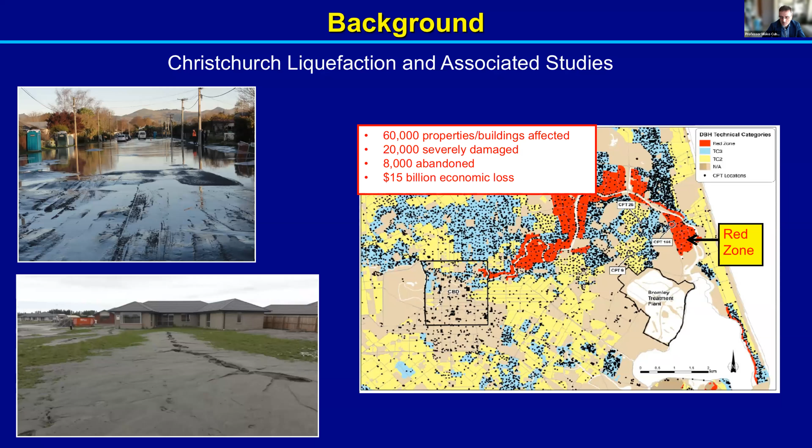There are numerous images such as those shown to the left, illustrating the extreme severity of Christchurch liquefaction. In one of our studies, we investigated in great detail 55 well-documented case history sites. As you can see, the sites are distributed throughout the city, and the red symbols here indicate sites that manifested liquefaction in multiple events. In most of the cases, it was severe or extreme manifestation of liquefaction.

Green symbols indicate sites that did not manifest liquefaction in any event, whereas black symbols indicate sites that didn't manifest liquefaction in the first major event in September 2010, but they did manifest liquefaction in the subsequent February 2011 event, which imposed the most severe shaking intensity throughout the city.

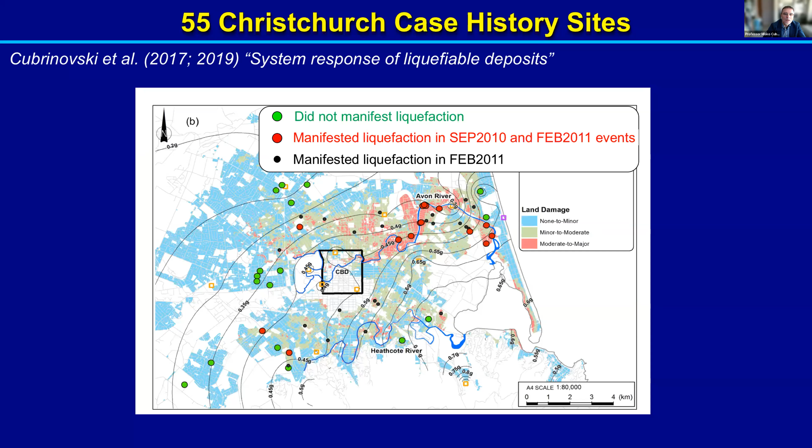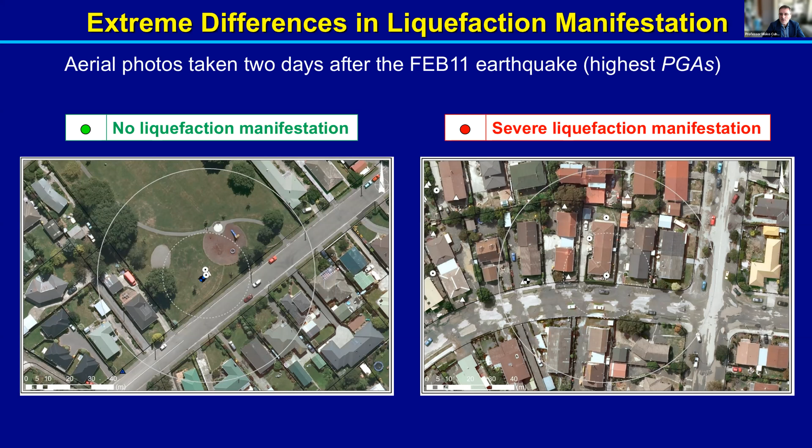There were contrasting differences in the performances of these sites, as evidenced here. On the left-hand side, you have an aerial view of a site that didn't experience any evidence of liquefaction, and you can't really see any ground distress due to liquefaction. Whereas on the right-hand side, you can see the image of a site that manifested severe liquefaction with large areas covered on the ground surface with ejected soils due to liquefaction. So with these studies, we tried to understand what are the key factors that were creating these kinds of differences in the performances.

And it was interesting that we found some important similarities, but also important differences between the two sites that manifested very differently during the earthquakes. On the similarity side, all sites had very shallow water table, and they had also very weak layer close to the surface of low liquefaction resistance, which would be considered a critical layer from manifestation viewpoint.

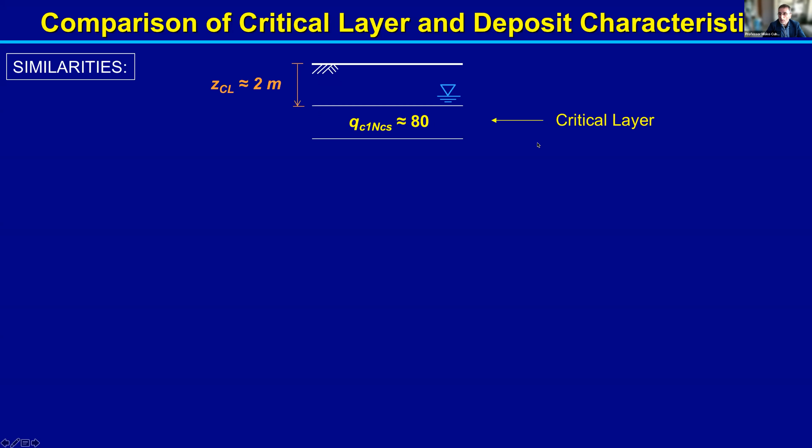As you can see, that layer is just 2 meters below the ground surface and has low QC1NCS value of about 80. And this was one of the reasons why the simplified method could not discriminate well between different performances, because in both cases, for sites that didn't manifest and for sites that did manifest liquefaction, the simplified method would predict severe consequences because of this very low resistance layer at shallow depth.

We found some important differences in the deposit characteristics between these sites. So sites that manifested severe liquefaction typically were composed of vertically continuous liquefiable soils, meaning all top 10 meters of the deposit were liquefiable soils, as shown by the CPT profile and schematic simplified profile next to it on the left-hand side. On the right-hand side are typical deposit characteristics for the sites that didn't manifest liquefaction, and they are characterized by interbedded deposits composed of non-liquefiable and liquefiable layers.

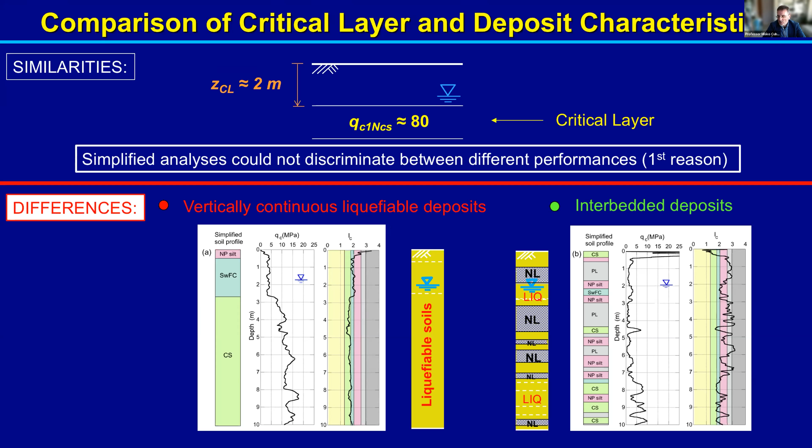So in our study, we were trying to understand how these differences in deposit characteristics are going to produce different responses of liquefaction when subjected to earthquake shaking. And for that reason, we used the seismic effective stress analysis to investigate those details. I will summarize now briefly some of our key findings from that work.

This slide is summarizing the key interpretation for vertically continuous deposits, or how liquefaction evolves throughout the depth and time in these deposits. Starting from left, in these deposits, typically triggering first occurs in the critical shallow layer. And this occurs early during the shaking, so the additional shaking is going to cause significant shear strains developing in that layer. Then the underlying soils are developing higher excess pore water pressures and triggering upward flow of water towards the critical layer, which further weakens and fluidizes the critical layer.

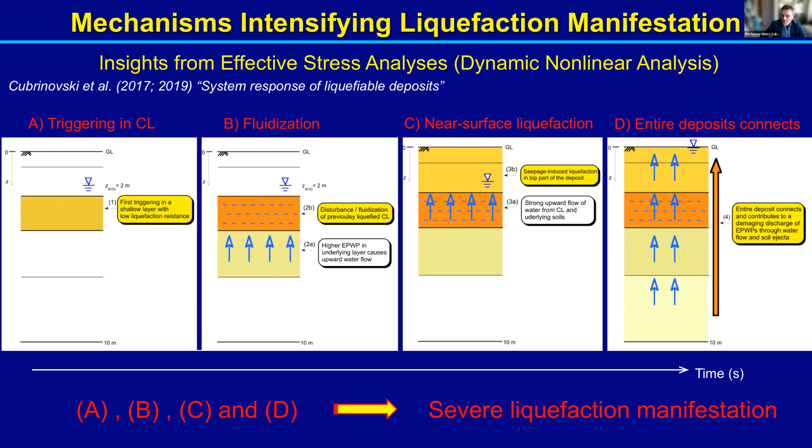This also enlarges the zone of liquefaction. So now this thicker zone of liquefied soil is producing strong upward water flow towards the ground surface and inducing liquefaction. Seepage-induced liquefaction occurs in the surface soils. And these three mechanisms then connect to create a mechanism throughout the whole deposit in which the soils from the entire deposit contribute to a very damaging discharge of excess pore water pressures through water flow and soil ejecta. These are all mechanisms that intensify liquefaction manifestation, and this can explain the large severity and extreme manifestation effects of liquefaction that we were seeing in those deposits.

From the effective stress analysis, we found that the mechanisms at work for the interbedded deposits are quite different. Typically, this deposit would have loose liquefiable soils at shallow depth, but also in the deeper part of the deposit. So the typical scenario for this deposit was that liquefaction actually first developed at depth, and the softening of the layer at depth was reducing the seismic demand for the deposit and reducing the shear stresses acting on the shallow critical layer. This in turn reduced the potential for liquefaction developing in the critical shallow layer.

In addition to that, because of the interbedded nature of these deposits, including some plastic soils, the near surface soils were partially saturated. And this further reduced the potential for development of liquefaction in the critical layer. Finally, as shown here, the grid of non-liquefiable layers is preventing any vertical continuity and communication of water through water flow of the liquefied soils. So these three mechanisms eventually resulted in relatively thick crust at the ground surface, and this crust prevented manifestation at the ground surface of liquefaction, even if liquefaction had developed at some depth within the deposit. So these are typical mechanisms that mitigate liquefaction manifestation.

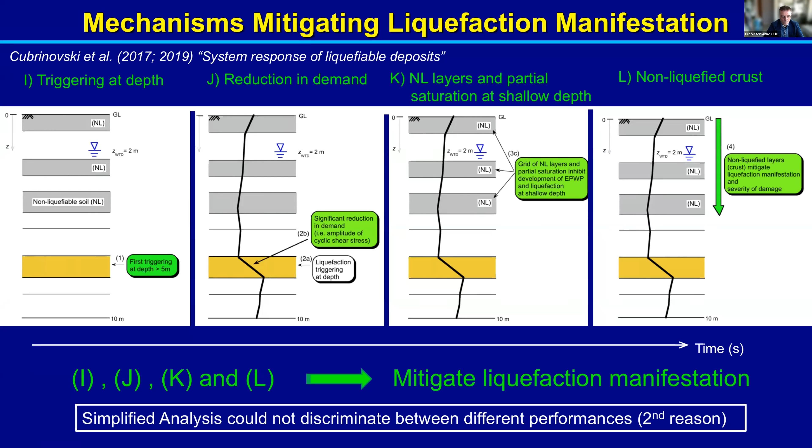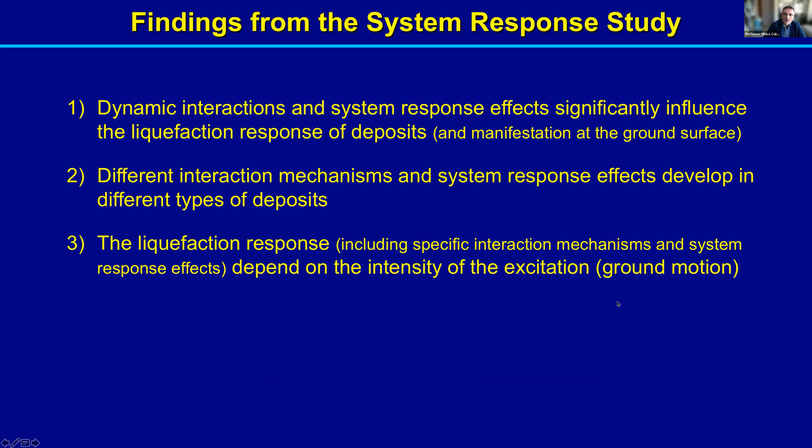So here is a brief summary of some of our key findings. First is that dynamic interactions and system response effects significantly influence the liquefaction response of deposits and manifestation at the ground surface. Different interaction mechanisms and system response effects develop in different types of deposits. And finally, the level of the liquefaction response that will develop and the type of mechanisms that will be triggered throughout the deposit really depend on the intensity of the ground motion or excitation.

Which brings us to the need to perform holistic evaluation of liquefaction response, which means we are trying to understand how the liquefaction response is going to evolve in the deposit as we are increasing the intensity of shaking. So that is the idea behind this holistic evaluation.

So after this brief background, I'm going to provide a summary of the concepts behind the holistic evaluation of liquefaction response. And we'll then move on sharing the results from effective stress analysis of 13 of the 55 sites where we have performed additional analysis within this framework. And then we'll show the result from simplified analysis of the same deposits so that we see what are the key differences and similarities between these two types of analysis.

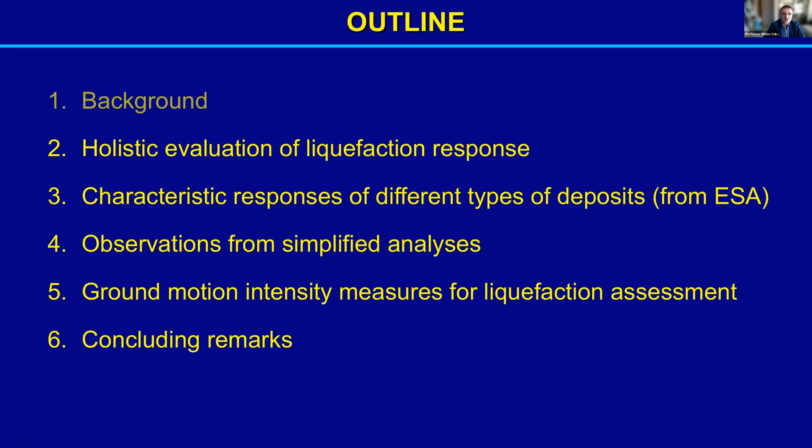Finally, I'm going to make a very brief comment on the ground motion intensity measures for liquefaction assessment, and will summarize with concluding remarks. So the framework of holistic evaluation of liquefaction problems is applicable to all types of problems, including soil structure interaction, but here we're going to focus on free-field level ground deposits.

So when evaluating the liquefaction response of deposits, I would argue that we have to address concurrently three factors in the assessment. The first is the soil response at any given depth, throughout the depth of the deposit. And this is equivalent to what we do in the laboratory when we collect high-quality samples. We test them in the laboratory to identify material characteristics and stress strain characteristics, including liquefaction resistance, and understand how that soil element is going to respond under earthquake loading when considered in isolation. So that is why I refer to this as element response.

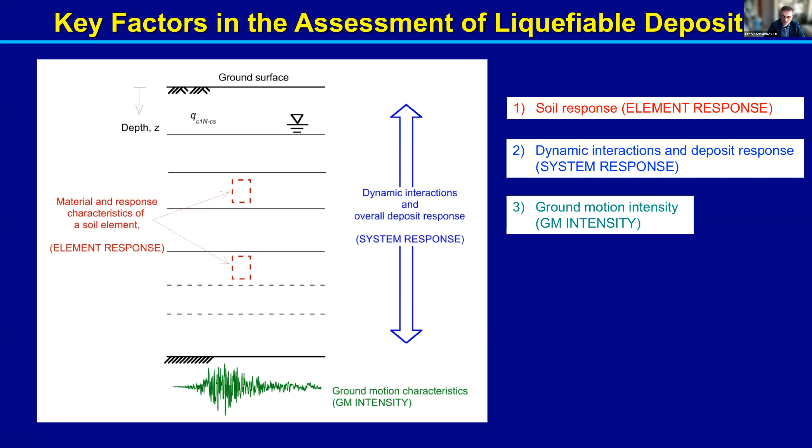From the previous discussion and the clear effects of dynamic interactions throughout the deposit, we need to also account for the second factor, which is cross interactions between soils and layers in the deposit and overall deposit response. And finally, the response at any given soil element, as well as the overall response of the deposit, clearly is going to depend on the intensity of the ground shaking. So we have to bring the intensity of the ground motion into the picture and concurrently consider these three factors in the evaluation.

On the horizontal axis, again, we can use different intensity measures. PGA 7.5 will be heavily used. I will explain the reasons why later on. It is not the best intensity measure, and at the end I will address some more appropriate intensity measures for nonlinear dynamic analysis, such as acceleration spectrum intensity and velocity spectrum intensity, and these are measures relevant for assessment of liquefaction response.

The idea is that we develop understanding of how a certain response feature is going to evolve as we increase the intensity of shaking. And this may allow us to identify important differences between deposits in their response characteristics, including differences in the mechanisms that lead to those responses.

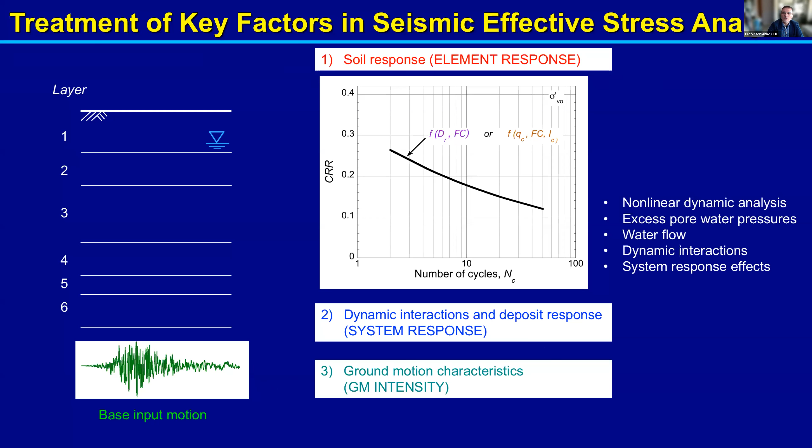And finally, the input motion is applied at the base of the deposit as a time history. We can adopt different ground motions, and with that we can examine how the response is going to change when we change the intensity of the ground motion or we change the characteristics of the ground motion. So we have rigorous treatment of all three factors.

In the simplified method, liquefaction resistance is typically derived from empirical triggering charts, and I would argue that this is good enough and rigorous enough evaluation of the liquefaction resistance for many of the deposits. We still have some problems there, but generally we're doing a reasonable job there.

The second factor is actually not considered. There are no dynamic interactions in this procedure. In essence, for any given layer, we calculate the factor of safety in isolation for that layer without any consideration of what is the response in the surrounding layers or the deposit as a whole.

And finally, the ground motion, or the input earthquake load, is severely simplified. We are using a couple of parameters, typically peak ground acceleration and earthquake magnitude. The first one is a proxy for the amplitude of shaking, and the second is the proxy for duration or significant number of cycles. And as a combination, they define the intensity of the input load, albeit in a simplified manner. One very important feature is that the load is defined at the ground surface.

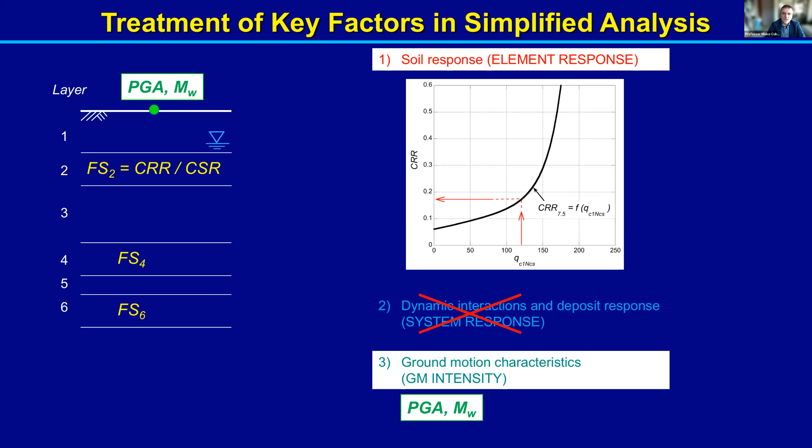Because of the way the load is defined in the simplified method, and as it differs quite severely from what we do in the advanced analysis, it is impossible to identify identical intensity measures for these two approaches in definition of the ground motion. And I will address that issue later on.

So the approach of this study was to select 13 sites from the 55 case history sites from Christchurch and perform seismic effective stress analysis for those sites. We derived numerical models using the CPT data, and for the layers defined in terms of qc1Ncs, we derived liquefaction resistance curves based on the Boulanger and Idriss triggering relationships, and then applied analysis using two ground motions as base excitations. And we increased the intensity of the applied load from very low to very high intensities to understand how the liquefaction response evolved in any of these 13 deposits. And we used this analysis to gain some further insights into the liquefaction response of different types of deposits.

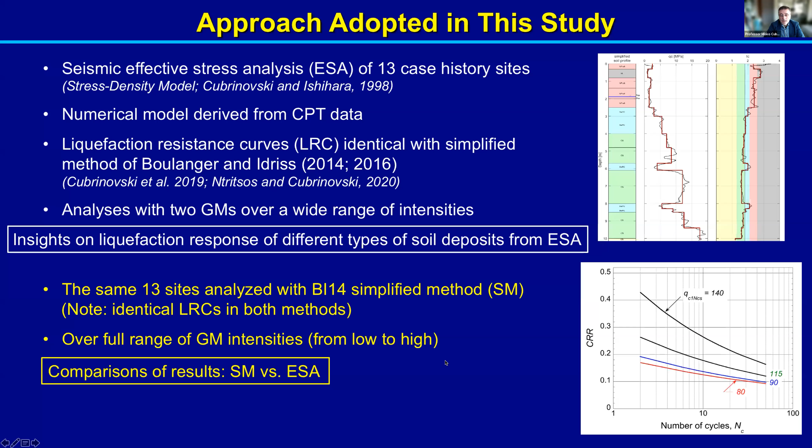The same 13 sites were then analyzed with the simplified method using the Boulanger and Idriss procedure. Notice that in both these methods, the definition of the liquefaction resistance is identical or equivalent, because in the effective stress analysis, we were using the triggering relationships from the simplified method to define the liquefaction resistance. So for the simplified analysis, a wide range of ground motion intensity measures were also covered. And then eventually we compared the results from the effective stress analysis and simplified analysis to identify key points of similarity and difference.

Just a brief reference to how we selected the 13 sites for analysis. Out of the 55 sites, there are 11 sites that we refer to as vertically continuous deposits, and you can see typical simplified profiles for these sites. They're mostly composed of sandy soil. Ic is 1.5 to 1.7 in these green layers, which are sands. qc1Ncs is mostly 120 to 125, though there are parts of the deposit that are denser, so 150, 160, 170 values for qc1Ncs are also encountered. In the top part, some of those deposits contain sandy silt and silty sand soils up to 2-3 meters depth or 4 to 6 meters depth, as shown with these profiles. So we selected 5 sites which are representing this type of deposits.

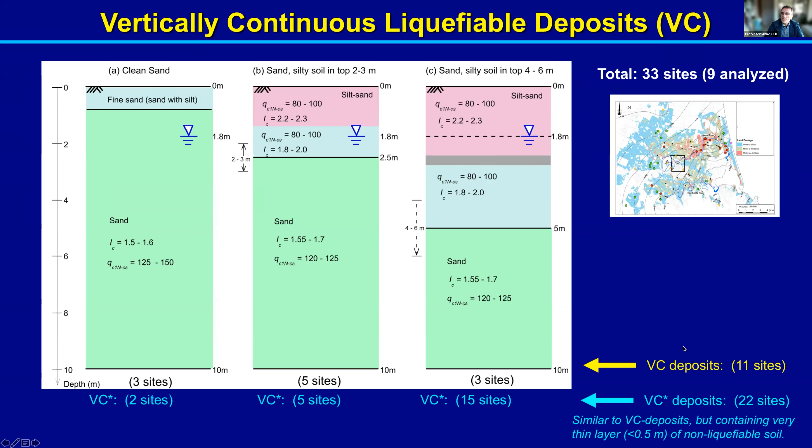In addition to that, there are 22 additional sites that have very similar characteristics to what we are seeing here, but they do contain a very thin layer of non-liquefiable soil, which is 30, 40, 50 centimeters thick, as indicated here by this thin gray shaded area. Essentially, these are vertically continuous sites, so we treat them as such, but we added 4 from these 22 sites for our in-depth analysis. And finally, we considered the interbedded deposits.

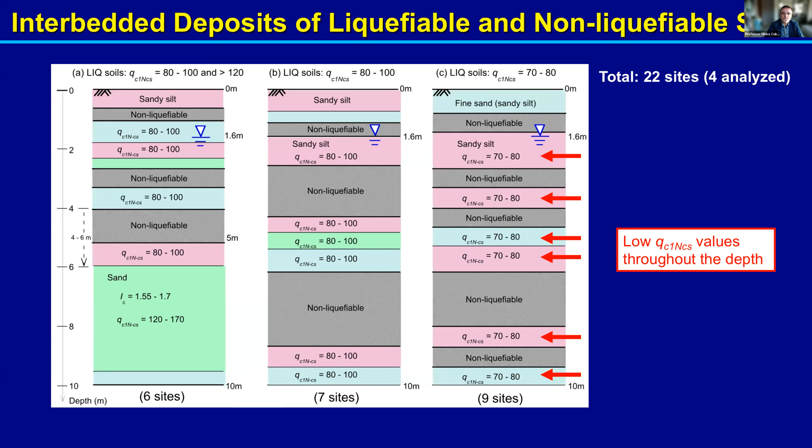In this type of deposit, for 9 sites, throughout the depth of the deposit, there is a low resistance layer with qc1Ncs of 70 to 80. All of these layers are sandwiched between non-liquefiable layers. These are similar types of deposits, except that qc1Ncs here is 80 to 100, still quite low. So one key feature of the interbedded deposits is that they have soils of low liquefaction resistance throughout the deposit, including at large depth.

So we selected 4 of those interbedded deposits for analysis. So in total, that made it 13. And then we subjected each of these to different levels of intensity of earthquake loading. And we examined the case history database from Boulanger and Idriss.

This is a CPT database in which there are 253 liquefaction case histories from 19 earthquakes, to identify what is the typical range of peak ground accelerations for the case histories. So this is the summary for all 19 earthquakes. For example, this black line here indicates the range of PGAs for the Christchurch earthquake.

So on the vertical axis, we have the recorded PGAs. So the PGA at Christchurch for the case histories was roughly from 0.18 G to 0.45 G. And on the horizontal axis, we can easily identify the respective PGA 7.5 values. Those are peak ground accelerations for equivalent magnitude 7.5. You can see the distribution of PGA 7.5 values for all case histories.

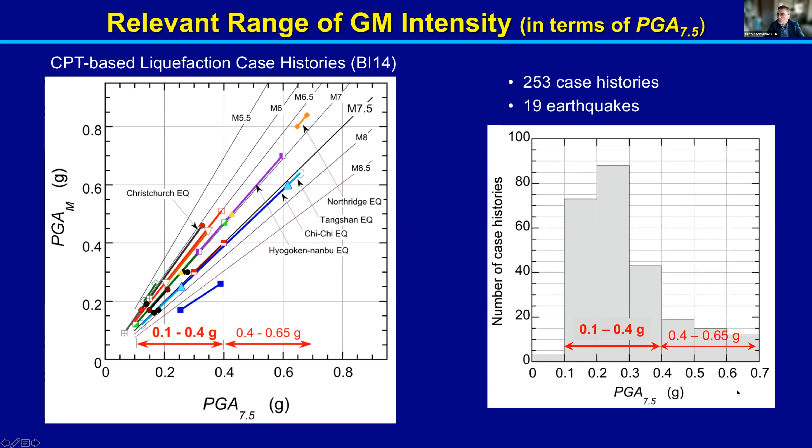So predominantly, PGA 7.5 was in the range from 0.1 to 0.4 G. And there is a smaller number of case histories that experienced a higher intensity of shaking, from 0.4 to 0.65 G. Obviously, these are sites closer to the source. So the conclusion from this was that in the holistic assessment, we have to cover intensities at least up to 0.7 G in terms of PGA 7.5.

Which brings us now to the results from the effective stress analysis for 13 case history sites based on using 2 input motions at the base. I will first show a typical and illustrative example of how the liquefaction response evolves throughout the deposit. So this is one of the vertically continuous sites.

We performed incremental dynamic analysis. So one analysis, say at 0.05 G, then another at 0.08 G, then 0.1 G, and so on, up to maybe 0.9 G. So I'm going to present some of those analyses to share the insights for how the liquefaction response evolves throughout the deposit.

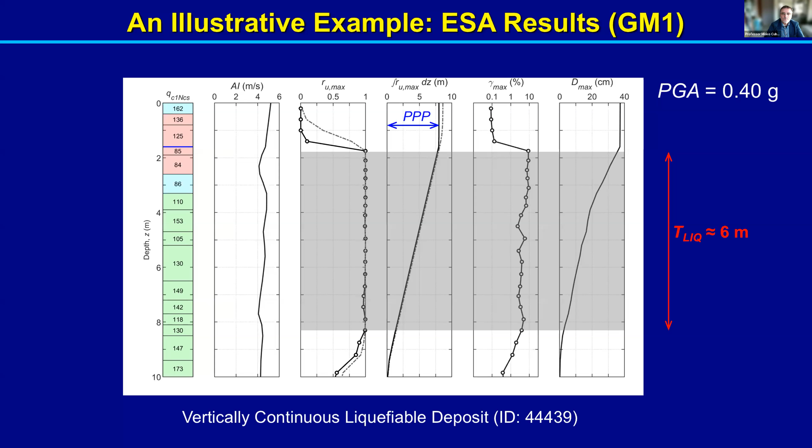As you can see, the soil from 2 to 8 meters depth liquefied, and then significant excess pore pressures are also generated below and above that liquefied zone. If we integrate RU in the top 10 meters, we are getting that the total excess pore pressure developed is equivalent to 8 meters out of the 10 liquefying. So clearly, we are getting very significant effects of liquefaction. Importantly, as you can see in these vertically continuous deposits, we are getting a very thick zone of liquefied soil.

So now we can summarize this type of results by plotting the results in this format. On the vertical axis, we now have the thickness of the liquefied soil. On the horizontal axis is PGA 7.5, or the intensity of the applied load. This is the thickness of liquefied soils that develop pore pressure ratio greater than 0.98 and also developed shear strain greater than 3%, meaning this is the thickness of soil liquefied due to shearing.

This is shear-induced liquefaction. So liquefaction triggering occurs at about 0.15 G, and the thickness of the liquefied soil increases. At 0.4 G, we can see 4 meters of the deposit liquefied, and then there is a further increase, and we reach the maximum at around 0.7 G, where 7 meters of this deposit liquefied.

Importantly, in this case, as we saw previously, all liquefied layers are practically connected, and they create this intensification mechanism, because collectively they increase the intensity of liquefaction because of the connection of pore pressures and water flow through those layers.

The same result here is now plotted with the dashed line, but in addition to the thickness of the liquefied layers, the blue zone now indicates the thickness of surrounding soils that have developed excess pore water pressures higher than the excess pore water pressure at the top of the critical layer. So, for example, at 0.4 G, this implies that there are 7 meters of soils in the deposit that contribute to water flow towards the top of the critical layer.

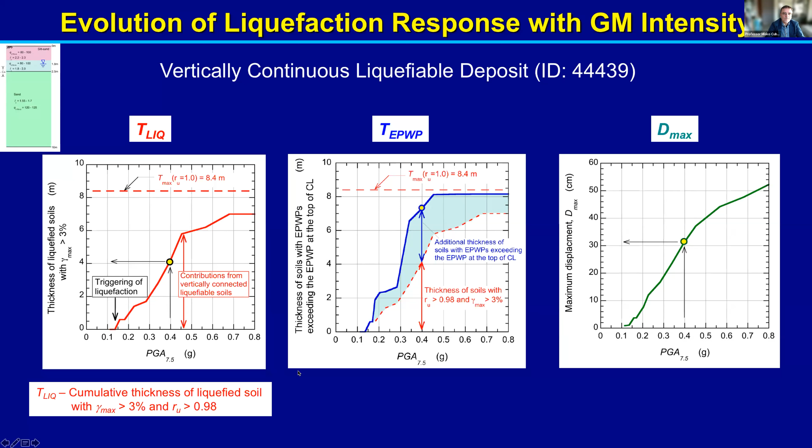So this is giving some insights about the significance of the seepage-induced effect, or water flow effects, throughout the deposit, and especially on the critical layer, which is close to the surface. Obviously, using this framework, we can display different types of results. Here to the right, for example, is how the horizontal displacement at the ground surface is increasing with increasing intensity of the ground motion.

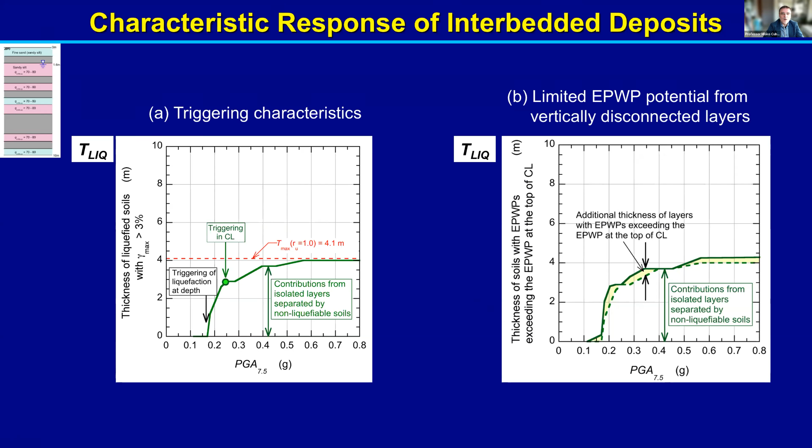In addition to that, we are seeing practically no additional contribution from excess pore water pressures from surrounding soils, which is simply reflecting the fact that the surrounding soils are mostly non-liquefiable.

Here I will now, just give me a second to, okay, thank you.

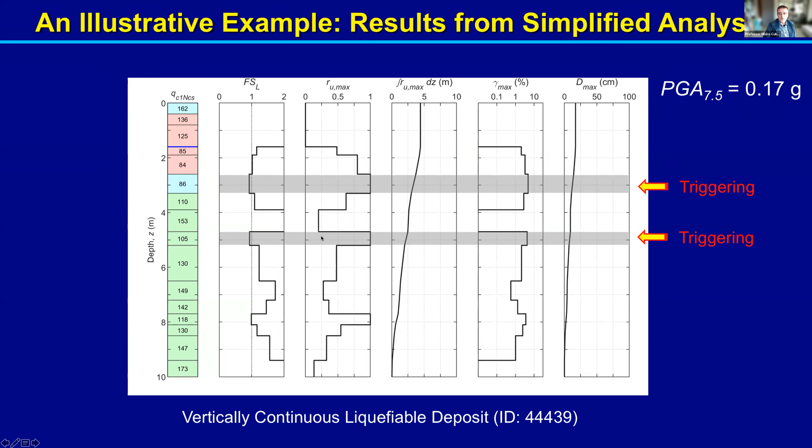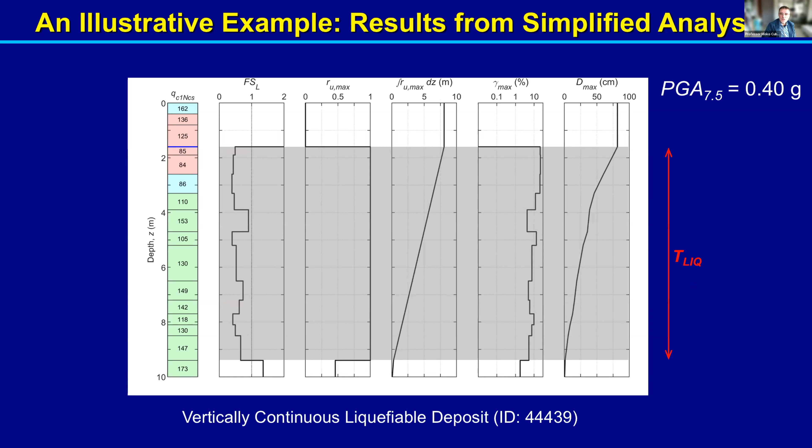So let's now compare these results with what we observed from simplified analysis. I will do the same animation as before for the same profile to illustrate how liquefaction response evolves in the simplified analysis. So this is now analysis for PGA 7.5 of 0.17 g. Triggering occurs pretty much in the same layer at similar intensity level. There is also triggering at a larger depth at 5 meters, which is reasonable because we have another weaker layer with qc1Ncs of 105 there. If we increase the intensity to 0.3 g, we are getting larger thickness of liquefied soils. And if we further increase the intensity to 0.4 g, most of the deposit liquefies. So generally, we are seeing a very similar thing.

But if we want to compare results from effective stress analysis and results from simplified analysis, we really need to compare them for identical intensity of the earthquake load applied in both analyses. Unfortunately, because of the way the earthquake loading is specified in the simplified method, it is impossible to identify identical intensity for these two analyses. At best, we can get close to similar intensities. And a parameter that is providing that is PGA 7.5, and that is why we have used it so far in all these plots. PGA 7.5 is peak ground acceleration for equivalent magnitude 7.5, and we estimated it for each of these analyses by converting the irregular time history that we applied at the base of the input motion to uniform amplitude series. And in that process, we adopted 15 cycles for the magnitude 7.5 earthquake, and the exponent in the magnitude scaling relationship was 0.34.

Obviously, PGA 7.5 in the simplified analysis can be easily calculated by using the PGA value, the earthquake magnitude, and the magnitude scaling relationship. Even though they're both called PGA 7.5, the way we calculate and define them is obviously very different. So we're kind of comparing apples and oranges to some level. Fortunately enough, what we found was that the PGA 7.5 that caused triggering in the simplified analysis was very similar to the PGA 7.5 that caused triggering in the effective stress analysis. As you can see, for 11 of the 13 sites, the triggering values in simplified and effective stress analysis are within 15% difference. There are two sites that differ more. One is a denser deposit, and the other is a very soft, non-liquefiable layer in one of the interbedded deposits that heavily affects the response in the effective stress analysis, and this effect is not accounted for in the simplified analysis. But generally, the triggering is at the same level, which really facilitates the comparisons that I am going to show next.

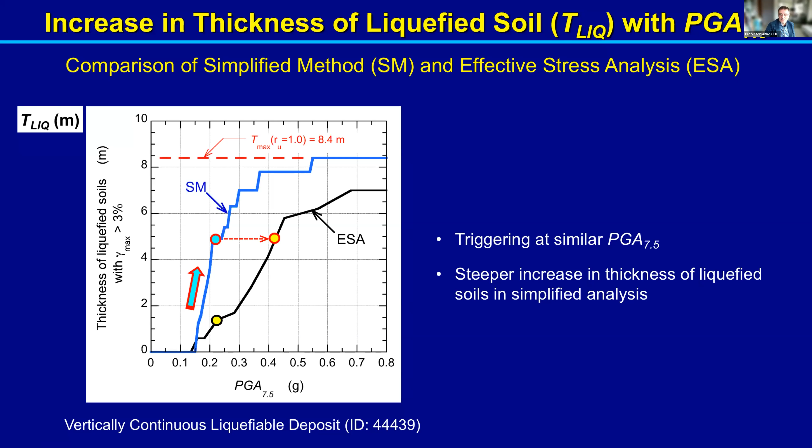So this is now comparison of the observed responses in terms of thickness of liquefied soils in relation to the intensity of the applied load. The black line is showing the response of the effective stress analysis, and the blue line is showing the response from the simplified analysis. We can see much steeper rise of the thickness of the liquefied soil in the simplified method as compared to the effective stress analysis. For example, at 0.22 g, 5 meters of soil are going to liquefy according to the simplified method, whereas only 1.5 meters of soil are going to liquefy according to the effective stress analysis. In order to liquefy 5 meters of soil in the effective stress analysis, we really need to double the intensity from 0.22 to 0.43 or something like that. So much slower buildup of thickness of liquefied soil in the effective stress analysis. And we attribute this to the reduction in the demand due to softening of the soils and liquefaction occurring somewhere in the deposit. And this response was observed for all types of deposits.

This is now the envelope result for 3 deposits, vertically continuous deposits. So the simplified method is this blue shaded area, and the gray area is the result from the effective stress analysis. The horizontal scale is slightly modified here. As you can see, this is now PGA 7.5 minus PGA triggering, which means triggering is at 0. So everything has been brought to the same point of triggering.

And what we are observing is how the response evolves post-triggering and what are the key differences. So clearly there is significant delay in the evolution of the response of the effective stress analysis as compared to the simplified method. This is an equivalent plot for two denser vertically continuous deposits. And again, to achieve the same response in the effective stress analysis, we really have to increase significantly the intensity of the input motion.

There is another important difference that I would like to highlight here. In the simplified analysis, for example, as you can see, both looser and denser deposits eventually achieve very high thickness of liquefied soil of about 7 or so. In the effective stress analysis, the denser deposits, even when you subject them to high intensity motions, because of the interactions that develop in the deposit, will show smaller thickness of liquefied soils.

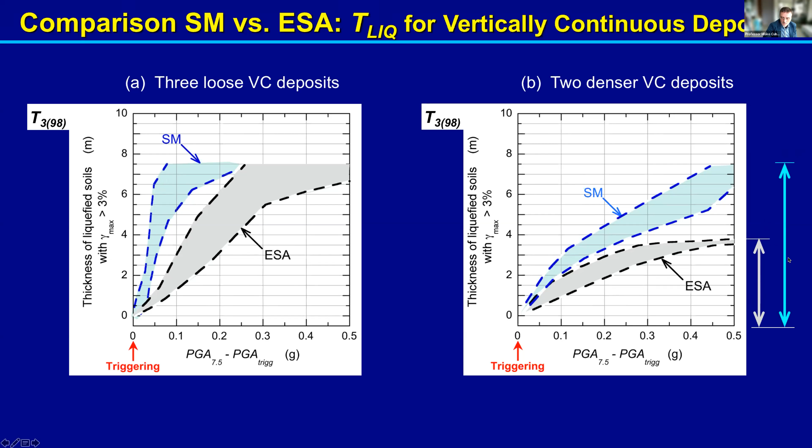So in other words, by introducing these interaction effects and system response effects, we are going to bring the capacity to better discriminate between different performances. As you can see at the end, the effective stress analysis is predicting only half of the thickness of the liquefied soils that the simplified method is predicting for the same deposits.

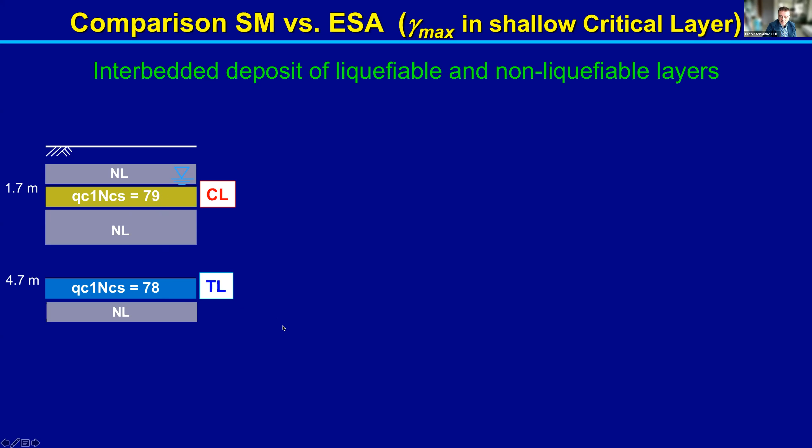I will bring now a little bit more detail. 4 out of the 13 deposits have this kind of configuration in the soil profile, where you're having a critical layer of low liquefaction resistance, QC1NCS 79 in this case. And deeper in the deposit, there is another layer with very similar QC1NCS value, TL indicated here. So let's compare how the responses in these 2 layers develop in effective stress analysis and simplified analysis.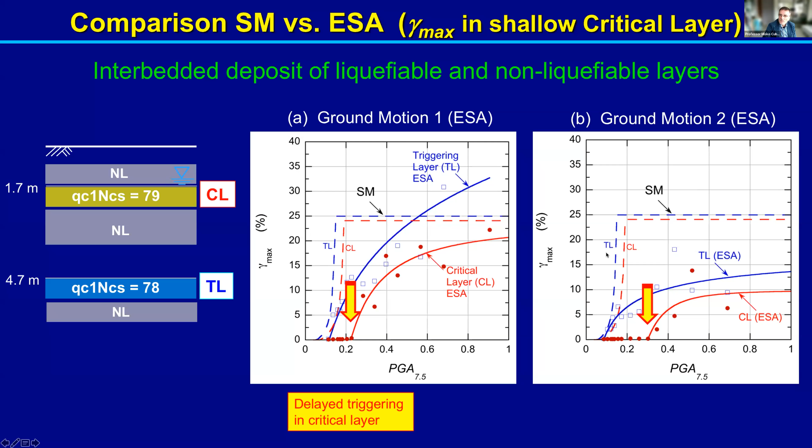The solid lines here were obtained when we used ground motion 1 from the Canterbury earthquakes, and we repeat the analysis using another ground motion, GM2, and you can see similar response. Actually, in this case, there was even further delay in the triggering of liquefaction in the shallow critical layer, clearly showing some significant effects of the interactions throughout the deposit on the response in the shallow part of the deposit. Obviously, the simplified method response is the same here.

So what we then did for all 13 deposits, we summarized the results for the maximum shear strain developing throughout the deposit for different QC1NCS values. For example, the red line and red shaded area show all layers in the 13 deposits, how they develop the maximum shear strain as we increase the PGA 7.5, irrespective of where they are located. Some are shallow, some are deeper. And this shows that all layers of this low resistance are sharply going to develop very high maximum shear strains.

You can see now the orange line is for QC1NCS 80 to 100. The green is for 100 to 125, and then we go towards denser deposits. Especially for these 3, we are seeing very sharp rise of maximum shear strains. And effectively, for all soils with QC1NCS less than 125, maximum shear strains will be reached at 0.25 G. So everything will be not only triggered, but everything will develop the maximum strain response. And this is reflecting this flat part in the triggering relationship.

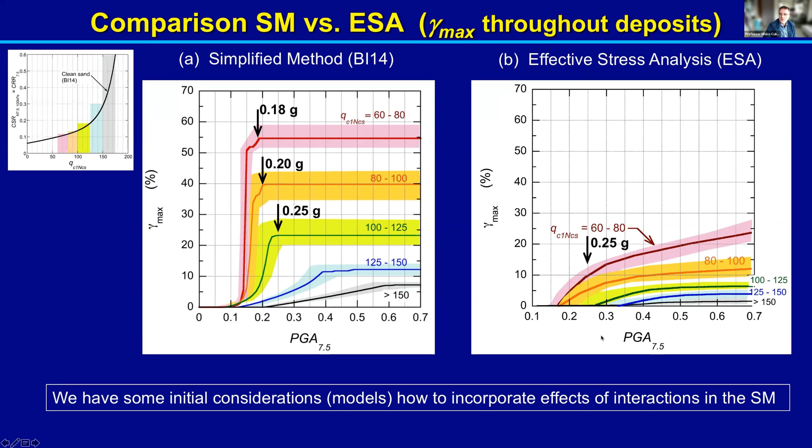My conclusion is that the simplified method is doing a reasonably good job for triggering in the loosest layers. However, once we have triggering, it is not reflecting the effects of the triggering of liquefaction, the reduction in demand and consequent delay in triggering in the other layers. And that is the key reason for the large difference that we are seeing here.

At the very end, I would like to make just a brief comment on the ground motion intensity measures for liquefaction assessment, which is related to what I was presenting so far. I'm showing again here the maximum shear strain versus PGA 7.5 obtained from effective stress analysis. So the solid lines are for different QC1NCS values when we used ground motion 1 for the analysis, and the dashed lines are for ground motion 2. So clearly we are getting different responses, or non-unique response, meaning the ground motion characteristics are affecting this response.

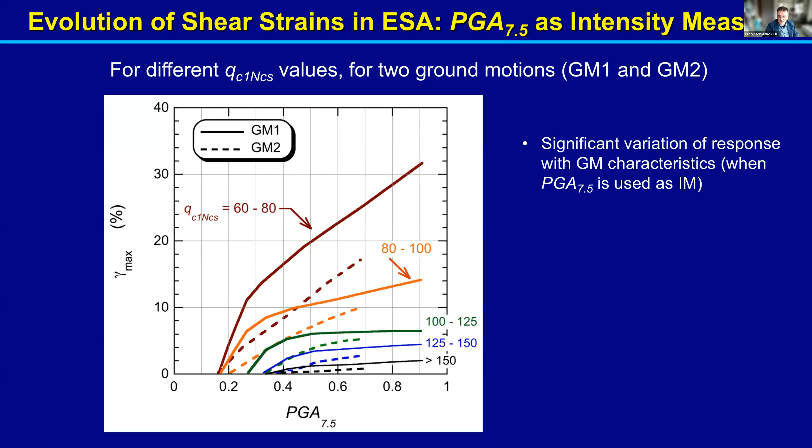And the reason for that is because we are using PGA 7.5 as an intensity measure, which is not the optimal measure. We use PGA 7.5 because that is the measure that we can use to compare effective stress analysis and simplified analysis. Probably, if not the best, it is certainly the most practical measure to use for those kinds of comparisons.

In order to understand better what intensity measures are best to use in liquefaction assessment, we performed 180 effective stress analyses for all these deposits. So each deposit was subjected to this number of analyses, and we were using 108 different ground motions that Bradley used in his study earlier. Each motion was scaled modestly from 0.6 to 1.6, and these are motions from 19 different earthquakes with this range of magnitudes. This presents results from one of the sites.

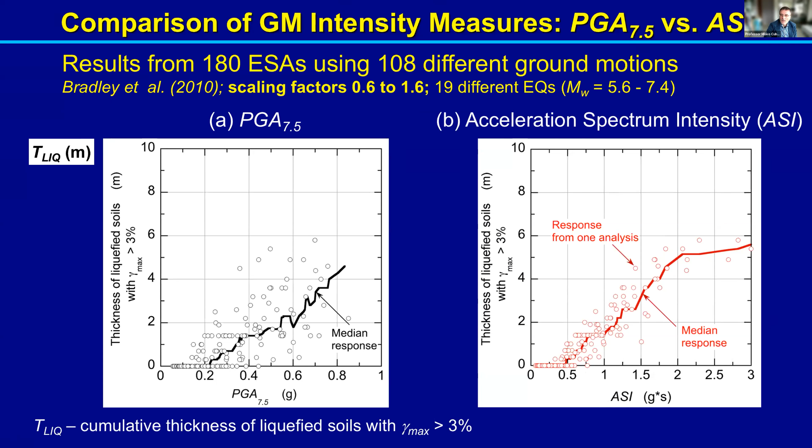Each symbol here represents one result from effective stress analysis, and the median response is shown, how it increases with the intensity of the applied motion. And clearly there is large scatter here because we are using PGA 7.5. If the same data is replotted in terms of acceleration spectrum intensity, there we are seeing a reasonably well-defined correlation between the liquefaction response and the acceleration spectrum intensity, despite using over 100 different ground motions. So our conclusion was that if you identify the appropriate measure, we are getting very good correlation between the liquefaction response measure and the intensity measure.

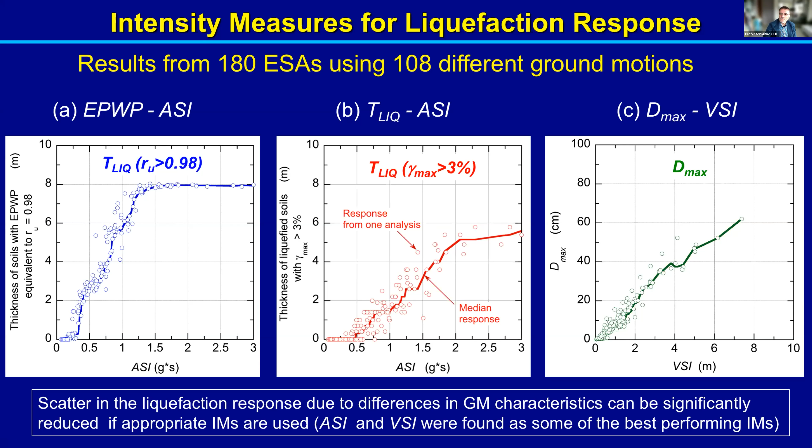The general conclusion is that acceleration spectrum intensity works reasonably well for response measures, including excess pore water pressure and shear strains, whereas the velocity spectrum intensity, as shown here to the right, where maximum displacement is plotted against VSI, is really providing good correlations when the displacement is part of the response. So by using appropriate ground motion intensity measures, we are significantly reducing the scatter in the liquefaction response in relation to the intensity of the input motion.

And finally, these are results for 12 sites. So please don't look at all 12. Let's focus on only one here. The second from the left at the top is for one of the sites. All plots are showing the same thing. So again, we have 180 analyses, and the green line is showing the median response. GM1, that is ground motion 1 that we used in the analysis, was recorded in the Canterbury earthquakes. And you can see that for small intensity it is very close to the median response, because we are applying small scaling factors in that case.

But here, the scaling factor is significant. It's 3, 4, 5. And you can see that the response produced by that unreasonably scaled ground motion is far exceeding the overall trend and even the outliers, and certainly is far away from the median response. So it's important to use modest scaling when performing a liquefaction assessment. And we can use different types of ground motion characteristics.

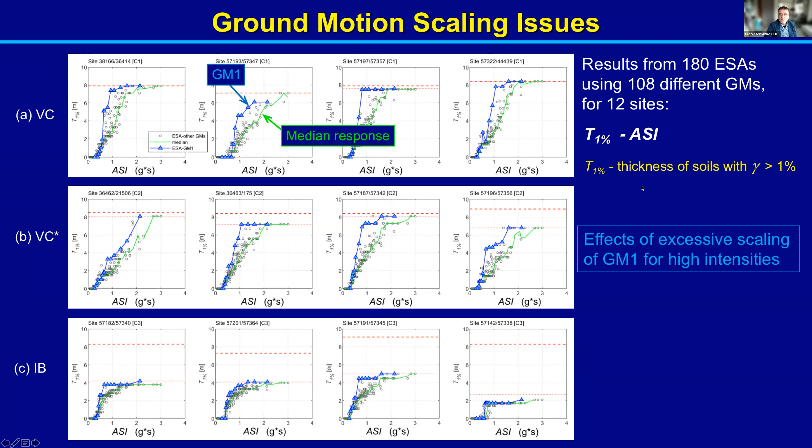The second important conclusion out of this is that the difference that we were seeing before between effective stress analysis and the simplified method would be even more pronounced if we use the median response instead of the response that we showed, which was related to ground motion 1. And this brings me to the concluding remarks. So three factors, the element response, the system response or interactions, and ground motion intensity, should be concurrently considered in the liquefaction evaluation within the holistic evaluation framework.

Effective stress analysis shows significant effects of dynamic interactions on the evolution of liquefaction response and consequent manifestation. The type of interactions, response mechanisms, and overall deposit response depend on the characteristics of the deposit, not only on the type of the deposit, but how densities and layering are distributed throughout the deposit.

For vertically continuous deposits, which are composed entirely of liquefiable soils, triggering of liquefaction typically occurred in the shallow critical layer. And this sets the first and foremost condition for severe liquefaction manifestation. When this occurs, I would argue that severe manifestation is guaranteed in most of the cases when you don't have obviously thick crust of non-liquefied soil.

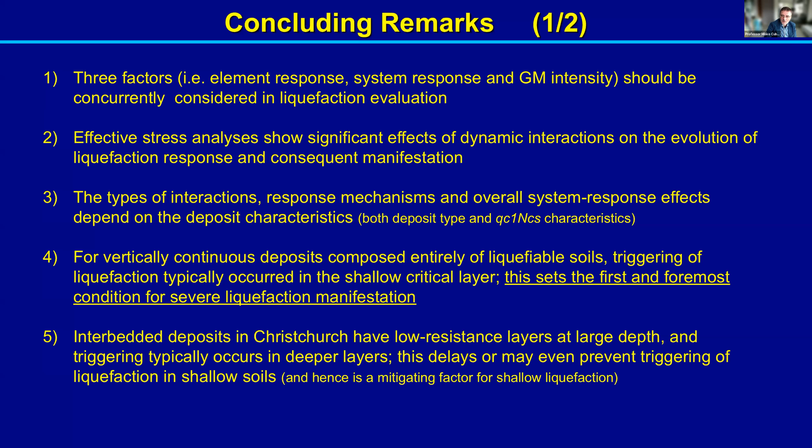Interbedded deposits in Christchurch have low resistance layers at large depth, and triggering typically occurs first at depth. This delays or may even prevent triggering of liquefaction in shallow soils, and hence is a mitigating factor for shallow liquefaction.

These are now some conclusions for the simplified procedure. Simplified procedure ignores dynamic interactions and system response effects and shows very rapid evolution of the liquefaction response from triggering to the maximum response. And this reduces the capacity of the procedure to discriminate the responses of deposits, especially in the range of qc1Ncs below 125.

As all these soils reach the maximum response within a very narrow range of demand, in our analysis from 0.18g to 0.25g. Hence, the conclusion is that effects of interactions and system response should be incorporated in the simplified procedure, albeit in an approximate manner consistent with the overall approach of this method.

And a couple of conclusions on the ground motion characteristics. It is on the intensity measures for the ground motion. It is impossible to identify an identical intensity of the input earthquake load for the simplified method and effective stress analysis. But PGA 7.5 is probably the best, if not the best, I would argue, certainly the most practical proxy for this purpose.

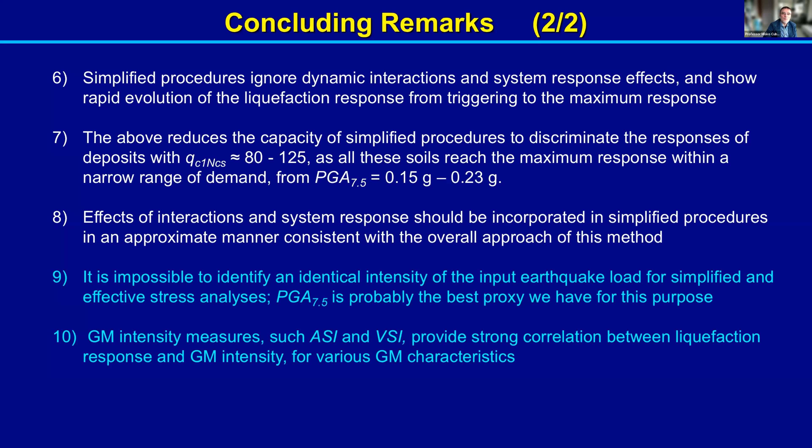And finally, ground motion intensity measures such as acceleration spectrum intensity and velocity spectrum intensity provide very strong correlation between the liquefaction response and ground motion intensity, despite the variety of ground motion characteristics in the adopted input motions.